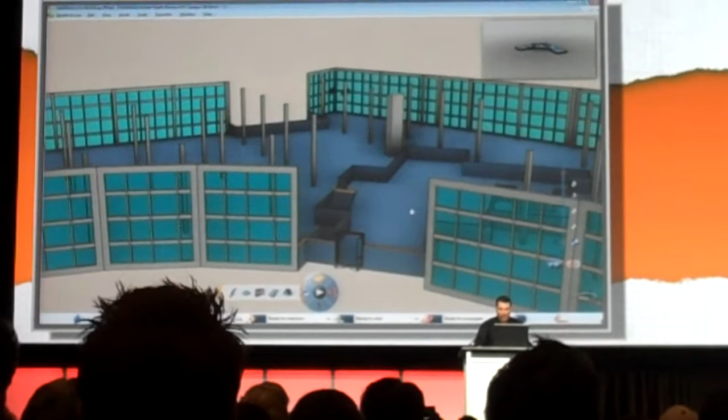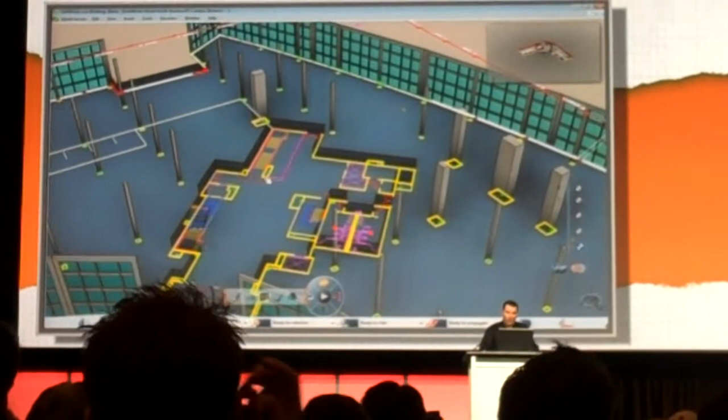So let's go ahead and add some content. We'll use this live section tool on the right, which is organized by floors. It makes it very easy to dive into the building and start adding content. Now, it's typical for planners to design a floor plan in 2D. This particular design was actually created in DraftSight, so we can take the DWG file and overlay it into our 3D design. This makes it easy to use as a guide to add content, such as walls and stairwells. Speaking of stairs, let's go ahead and add one in.

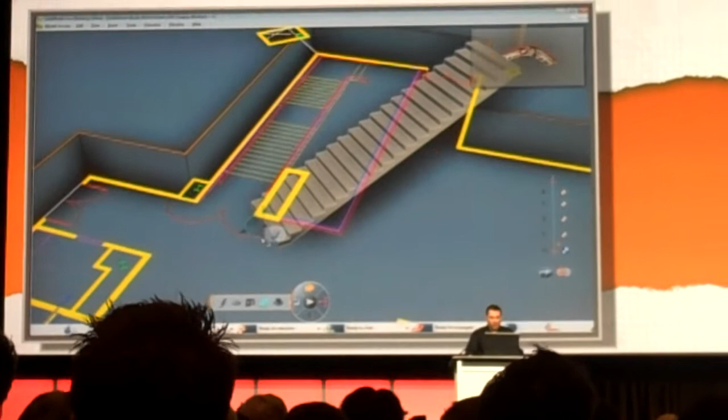You can see it snaps to the floor and brings on a triad, very similar to the one you find in SolidWorks. So you can move it across and snap it up against the wall. This content is intelligent as well, so it'll add a hole in the floor above.

We know that not many of our customers actually design buildings themselves, but many of you design content that goes into buildings, such as furniture, plumbing and air conditioning. So what we've done is made it easy for you to share your content with the building planners.

Let's go ahead and search some content online, and it's going to give me a number of items that we're going to use within this building. So we'll take a look at the cubicle and just drag and drop that into the floor space. It uses a concept similar to SmartMate, so it knows exactly where it's supposed to go.

If you want to make a copy of that, we'll simply use the triad, as we saw previously, and just drag it over to the left. So you can see, very quick, very easy, a very nice conceptual tool for designing office space. We can also use the concept of patterns to update this design as well.

Starting to look good here. We can see we've got a nice layout of cubicles in the building. What we don't have is any office space, so let's go ahead and add some of those for the execs.

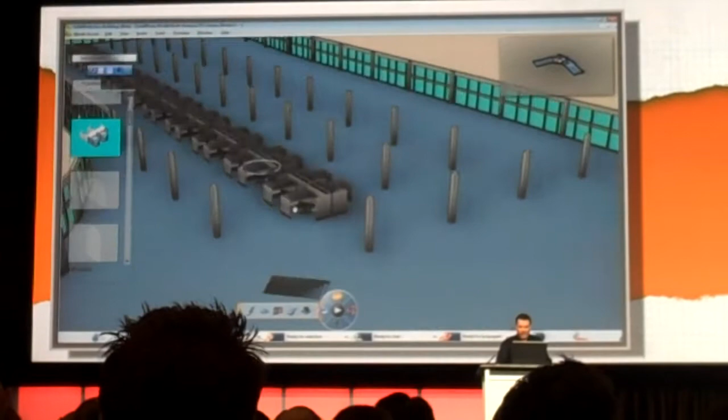If you want to add an office, just go down to a very simplified user interface at the bottom, pick a rectangle, and we're just going to draw the space up against this wall here.

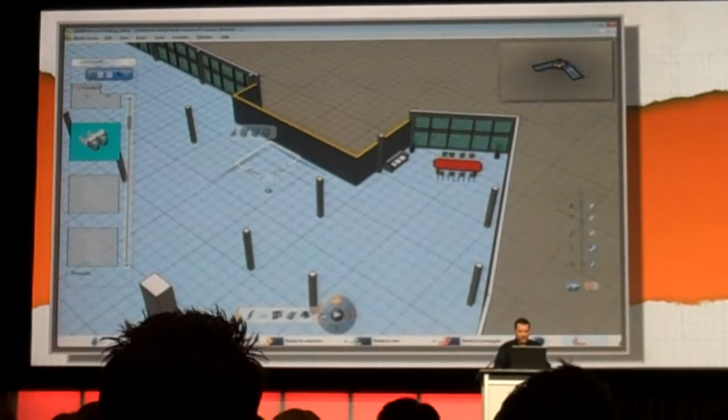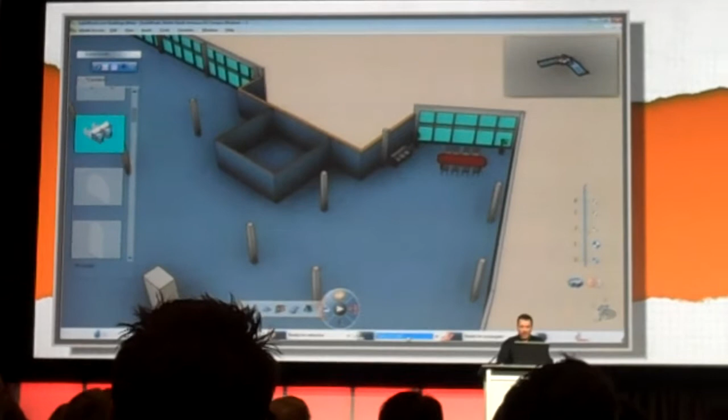Because we're based on the V6 online platform, it makes it very easy to collaborate with customers and suppliers. There's a very handy little chat section at the bottom there where you can work with your customers.

Apparently there's a new CEO in town and he wants a bigger office. So let's go ahead and make some changes to that.

So we'll go ahead and resize this. Just go ahead and pick a wall, and again, using the triad, we'll just drag it out.

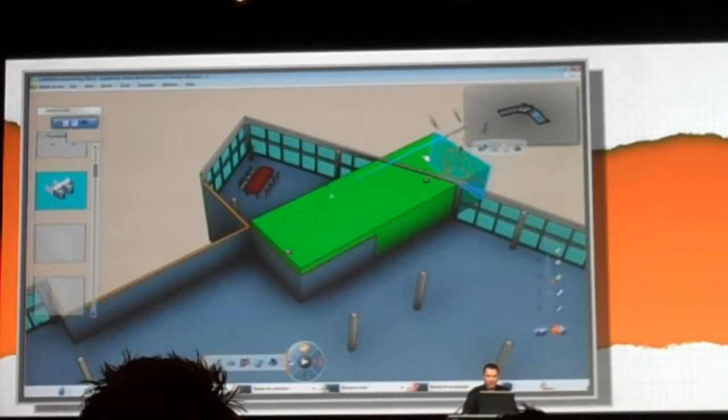SolidWorks Live Buildings understands the difference between interior walls, exterior walls, and curtain walls, so you can see it automatically trims itself back. And we can either delete that wall or just drag it over there to finish our design.

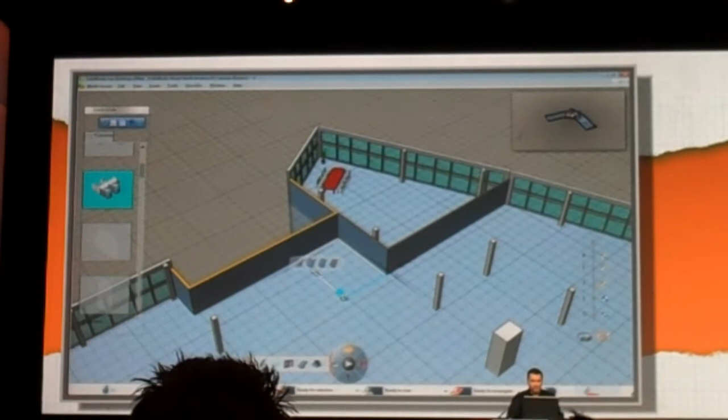Now, of course, we now need to add an office for the Trans assistant, Trina. So we'll just go ahead and drag and copy to create a new office right next to the Trans. And as before, we can just take that and use the triad and copy and paste that over to the left.

Perhaps make an office for Fielder, and if we pattern it, perhaps I'll take one of those myself as well.

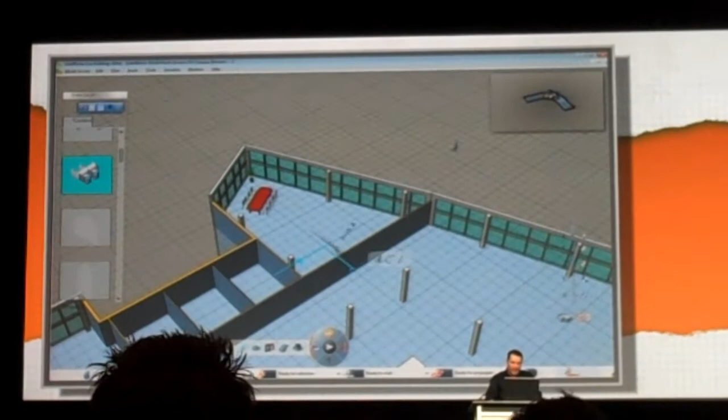I know that Trina won't be really very happy with an office that doesn't have a window, so we'll go ahead and steal some of Bertrand's space and just go ahead and draw lines.

We can use lines, arcs, any particular shape you want to create an office space, so you're not limited in your designs. Okay, so looking pretty good.

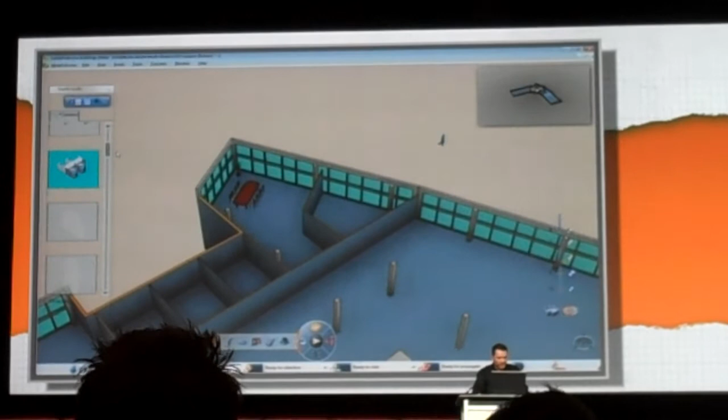Finally, the content we'll add is just going to add in a door. It uses the smart mates that we saw previously to snap them into place. But being a door, it also behaves like a smart component—it knows that it needs to cut a hole out in the wall.